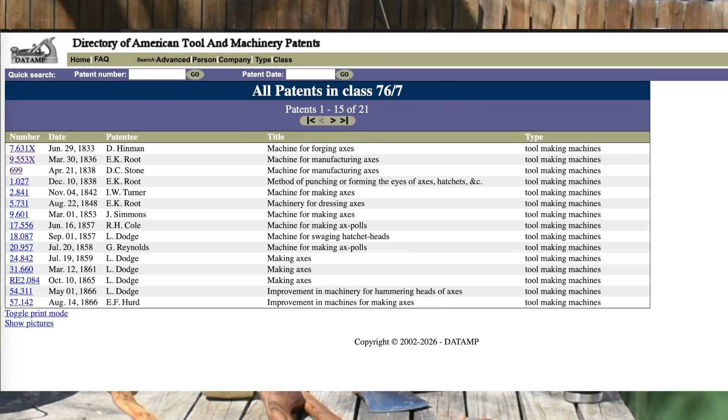So I went looking through patents, the Google patents, you know. And the first problem I have is you're not going to find them all with Google. You'd have to go to the patent office, sit down, physically look at the patents.

For a short given time period I was looking at, there were 18,000 patents. Somebody would have to sit there and hand load each of those into the computer to make them available online. In short, I'm not going to find them. It's not easy to find the patents. But I'm looking for the patent. How do we automate that so that we're still doing it in 2026?

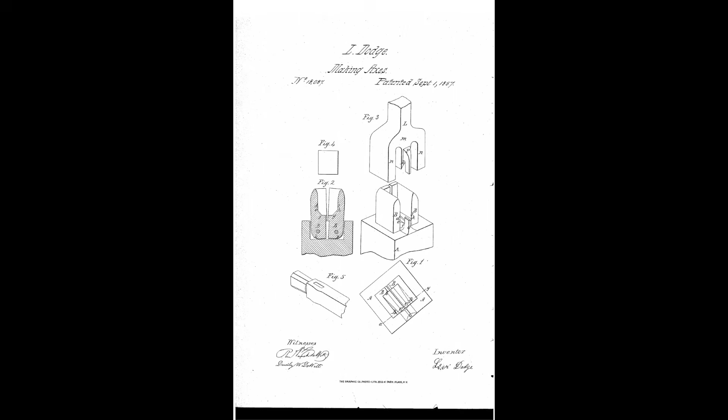Surely, someplace has put in a patent for a die or a machine that forms that without having it take so many separate steps. So I found out they did once. I found a patent from 1857. Was it 1856? I'll put it up here. It actually was in a saw blade manufacturing plant. Said, we want to make axes.

So I think I've found two different patents for this guy and his partner. One was for a machine to make axes. I found lots of patents for the machine itself, an automated machine for forging hammers, hatchets, and axes. His die was a complicated multiple part die that as the hammer came down, he had it channeled in such a way that you put the billet inside of the closed die. As you are driving it down, it sucks in the sides.

So he's not making his this way. He's making his this way, vertically. And he does it in one process. His hammer comes down, drives on the top of the die, pulls in the sides. And the top die and bottom die both have these little tangs that hang out. They're tapered. I'm going to go analog on you here for a second.

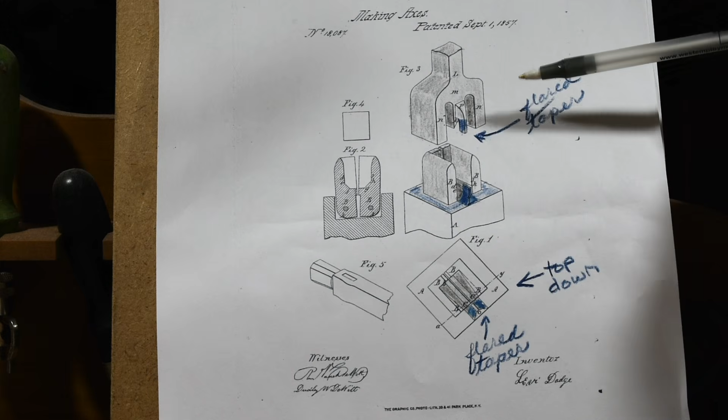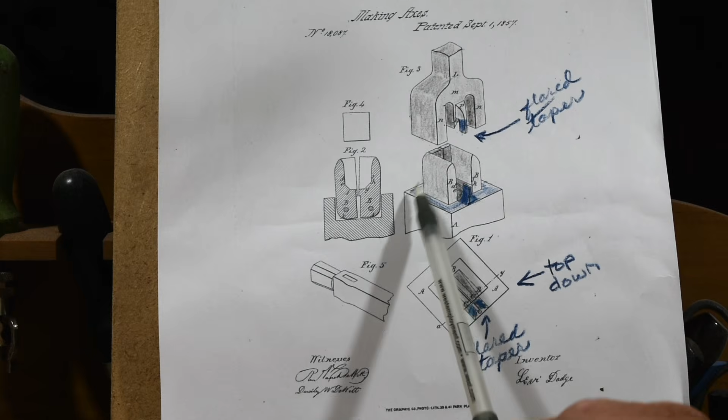But you see on this drawing, maybe you can see it better, how this top die here has these little recesses built into it. They're going to slip over these sides. So this is the side showing you that it's hinged. You drop your billet in here, that octagonal bottom here makes that shape of the hammer against the top in there. As the hammer drives this down over the top, this little tang out here in the front and this little tang down here on the bottom, those are going to meet in the middle.

I'll show you a bigger version of this. There, now you'll be able to see it a little bit better. Okay, here's that top tang, and here's the bottom one. Those are creating the tapers. Now they're only going to go in, see I darkened it right here? They're only going to go in about that far before they bottom out. Same with this one on the bottom. This one's twice as long as that one, meaning this will be 2/3 of the way down where it meets.

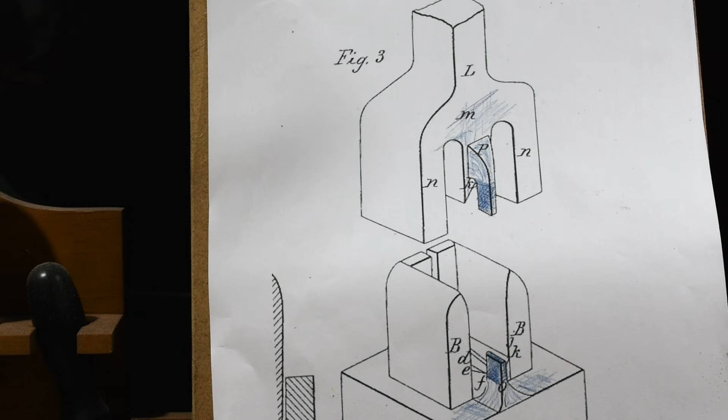Okay, so they're punching the eye in at the same time they're making the head, and instead of making the head flat like this, they're making it vertical. And I'll explain why that didn't catch on, because that's not the way it's done, guaranteed. So the top one goes down and the bottom one comes up through the eye, and those little tapers, one goes this way, one goes this way, they meet exactly at 2/3. Every single head actually used it.

That machine was patented and built and used for about 1.5 years before the company went under. I have no way of verifying whether they were acquired or just went out of business, but at that same time, going into the late 1800s, giant axe manufacturers were dominating the market and these little guys were going out of business.

I like the way that Claude put it. The AI platform, Claude AI by Anthropic. I just am tickled every time I use this thing because it's so much more chatty and interactive and thorough than Google AI or ChatGPT. Those are kind of robotic.

This one's a comedian. And he said, it seems like that patent holder solved a problem in 1857 that no one's needed solving since. Because they just thought it wasn't worth the time or the money or the effort or the frustration of having to fix their dies or having extra dies around every time they broke.